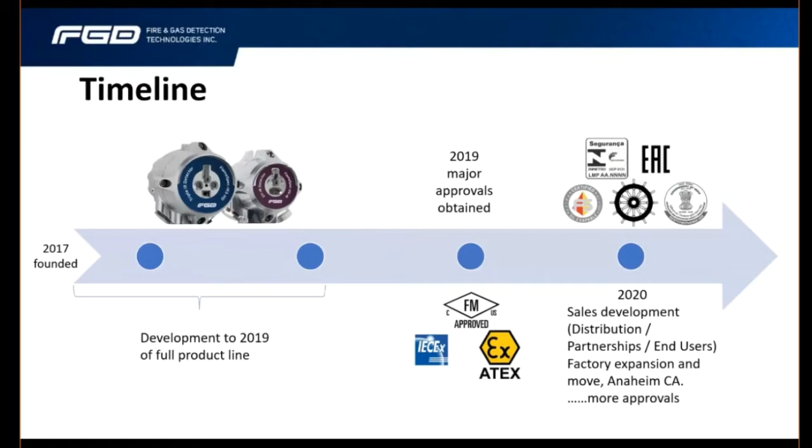We've also started development of an open path gas detector platform, and we'll present more on this at a later date. And so today we have two flame detector product lines matching technology with fire risk and application considerations. The technologies cover UVIR for hydrocarbon, metal, and inorganic fires, IIIR for hydrogen, silane, and some other special applications, and of course IIIR for visible and invisible hydrocarbon fires.

The two product lines were developed to have the same flame detection and fire alarm integration capabilities. The main difference between the two lines is with the video capability of our HD detectors. We will learn more about this in this presentation. Right now, we will pause to quickly review what affects flame detector response.

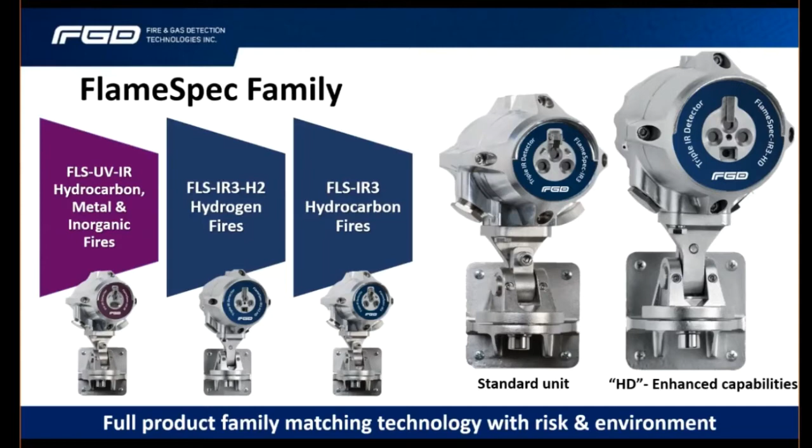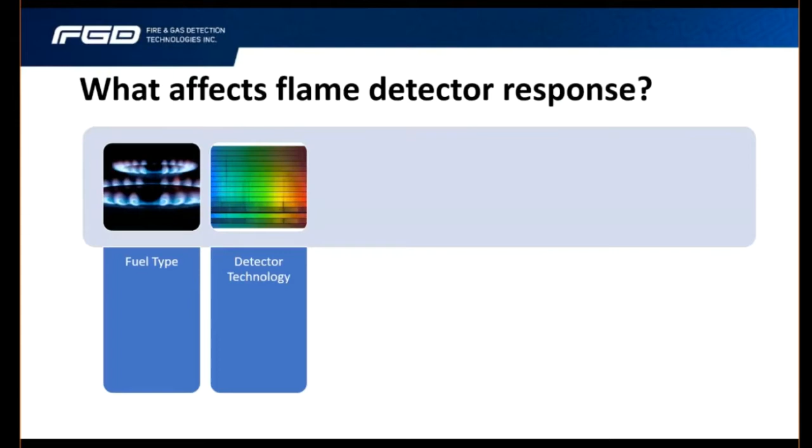Our starting point is always what is going to burn. A large luminous smoky flame like crude oil, or a low energy near invisible flame like methanol burn very differently. Whichever it is, we must ensure the flame detection technology selected is able to respond to the fuel burning. Detector sensitivity and distance from the fire are very much linked factors.

We then need to consider the detector field of view in both the horizontal and vertical planes. As a side comment, you might find it interesting to learn that a field of view greater than 90 degrees in the horizontal axis does not always equate to better performance. I'll leave you with that thought for now, as we will discuss this point further in the presentation.

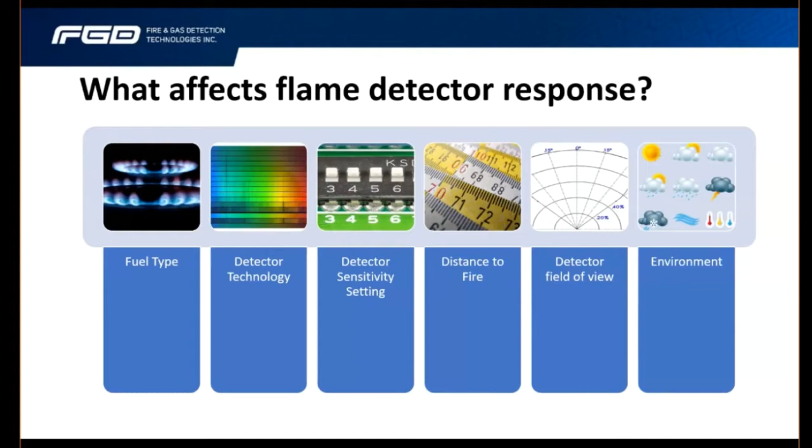And another point to consider is the environment in which the detector is installed. For example, the demands of a detector in an acoustic enclosure of a gas turbine are very different to the challenges posed by the depths of winter in Canada or Kazakhstan. And last but not least, we must turn and consider false alarm sources.

Flare stacks are friendly fires. The challenge is that no flame detector can tell the difference between a hazardous fire or a friendly one. Care and attention with the installation, linked with mechanical blinkers and sensitivity reduction, can normally help minimize false alarms.

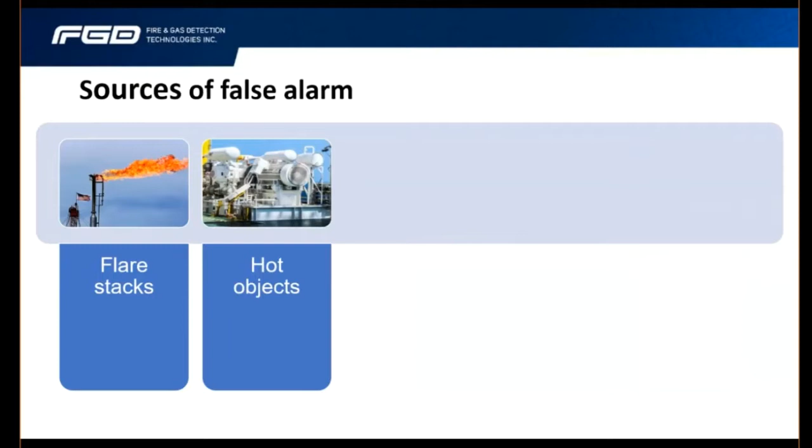Hot objects, as we will see in this presentation, can cause issues for some flame detectors. The main recourse here is to reduce sensitivity. Sunlight and sunlight reflections can be an issue for some flame detectors. Mechanical blinkers may help where this is an issue.

When hot work is being conducted in close proximity to a detector, it is normal to isolate the alarm outputs. The main historical issue relates to arc welding and UV detectors, although activities where heat is produced, such as grinding and cutting, may be an issue for some IR flame detectors.

And finally, hot CO2 or carbon dioxide emissions can cause some multispectrum IR detectors to alarm if they are mounted in close proximity to the source. This issue can be resolved by relocating the detector, or if this is not an option, other solutions may be available. The challenges posed by the fire risk, application and installation and presence of false alarm is a complex one.

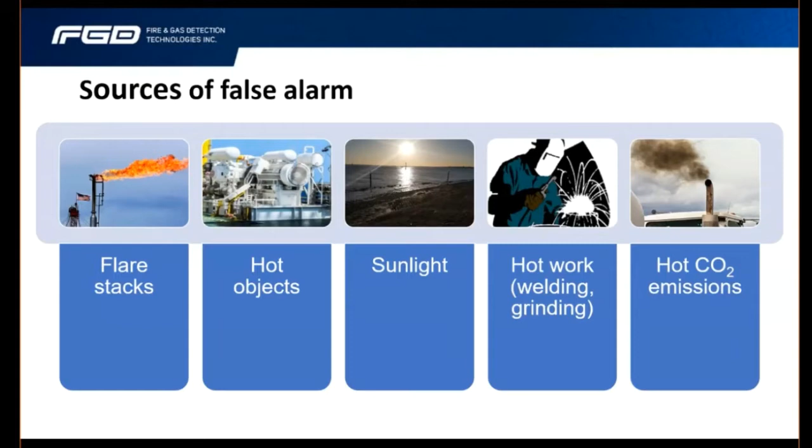So when we take these points into consideration, we must always ask, is there a perfect flame detector? And as always, the answer is no. All flame detectors have strengths and limitations. Therefore, when selecting a device, it is important to use the most appropriate technology for the application. This is, of course, why we have a range of products and technologies that match the challenges of the installation with the detection performance needed. In this webinar, we will be focusing on the FlameSpec IIIR hydrocarbon flame detector.

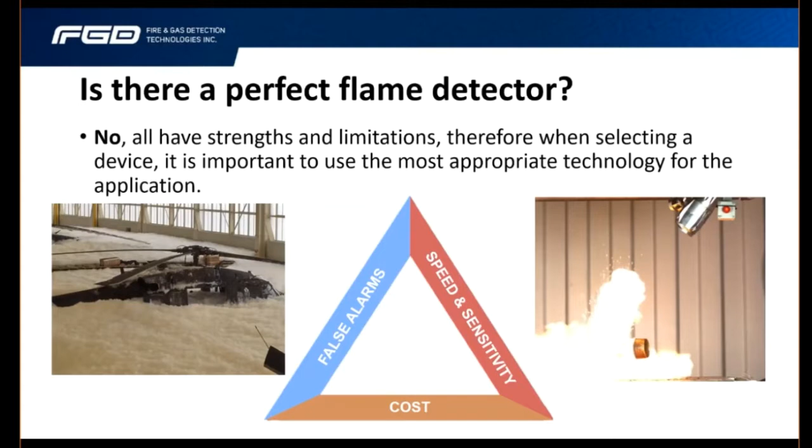So, what have we developed? Well, we developed a detector that in a single unit responds to explosions, fast fires, slow evolving fires, small fires, and big fires. The detectors work indoors or outside over an extremely wide operating temperature range. The detectors have best-in-class response to a broad range of fires and outstanding false alarm immunity, all of which is

approved by Factory Mutual. In a single unit, we deliver as standard fire and fault volt-free contacts, a 3-wire 4 to 20 milliamp, both current sink and current source, an isolated 4-wire 4 to 20 milliamp, and an RS485 port utilizing Modbus RTU. We also include heated optics, adjustable sensitivity and time delays, all again as standard. What is more, all of our detectors are delivered with a 5 years warranty.

As mentioned earlier, our HD units provide a live video feed and high-speed recording of events, 1 minute before the alarm and up to 3 minutes after it. I'm sure you now want to know something of the detail of what we've actually done. So, with a mature technology, it's unlikely that dramatic improvements in detector performance would occur due to changes in any one area. In the following slides, you will see that subtle incremental changes based on years of product knowledge have culminated with the development of the FlameSpec IIIR.

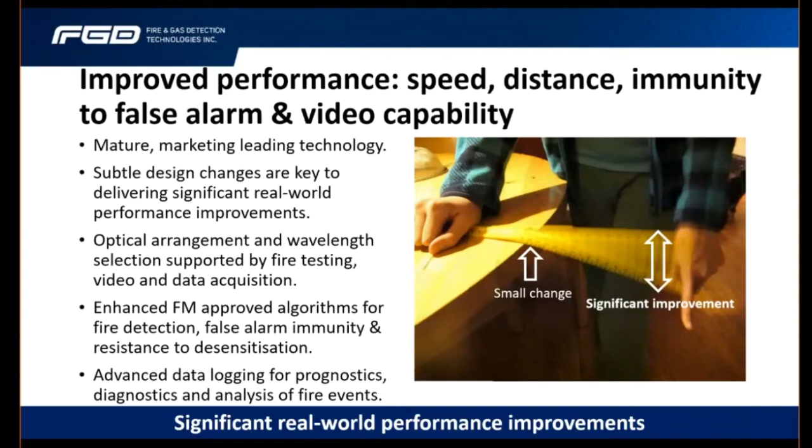Excellent. Thank you very much for that. And just so you know, I now have to open the next poll, which will be coming up later in the presentation. So, okay.

So moving on, what we now need to focus on is the wavelength and filter selection. It is widely known that hydrocarbon fires generate a plume of hot carbon dioxide, and that most IR3 flame detectors use this key feature to detect flames. Our fire band wavelength is centered around 4.5 microns, and we use two adjacent guard band wavelengths, one at 4 and one at 5 microns. These wavelengths help improve the false alarm immunity of the flame detector.

One point I should highlight is that there is no overlap of the wavelengths we use. This is important as it means the information we're receiving from each sensor is uncluttered. A good analogy is to think of the sensor filter combination as a single pixel camera. The colors that we receive from these cameras are vibrant and sharply defined, and they are completely uncluttered. This means that the analysis of thresholds, signal ratios, and correlations can be conducted more quickly. This, coupled with enhanced signal flicker frequency analysis, improves positive fire detection and false alarm immunity.

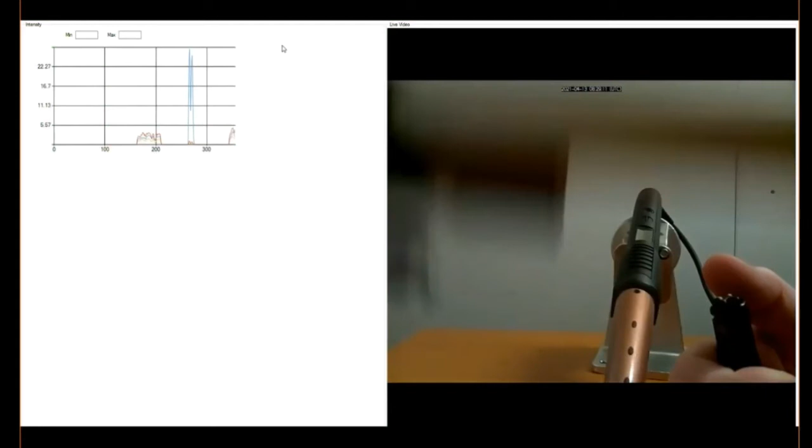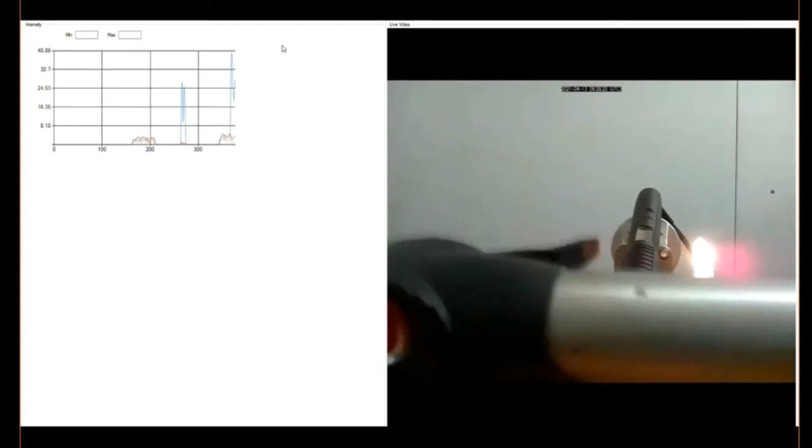The second video on this slide demonstrates a much harder challenge for the detector, as we are actively trying to confuse it by mixing a modulated heat and flame source at the same time. As with the modulated heat source video on the previous slide, the detector could be looking at a hot vessel, heat exchanger, or pump when the chopping motion of hot, cold would be seen. This time, watch as the 3 signals are generated due to the modulation, and then what happens when the flame is introduced. You will see that the correlation of the guard band wavelengths remains closely matched, and that the response at 4.5 microns is very strong. The detector correctly identifies that a flame is present.

One other point just to note was that the traces were all continuous, so I promise you there's no smoke or mirrors or video editing going on there.

Next, we need to look at our enhanced optomechanical design. The FlameSpec fascia gives it a very distinctive look and feel. Unlike some competing products, we have no need to use sunshades to stop water dripping into the detector optics. This is because we have a brow that forms part of the stainless steel casting. The 3 IR sensors sit behind a heated sapphire window. The FlameSpec design uses a heating element in direct contact with the window, as this is a more efficient way of heating the optical surface than using an array of resistors mounted more remotely. As a result, we have lower power consumption than many competing devices.

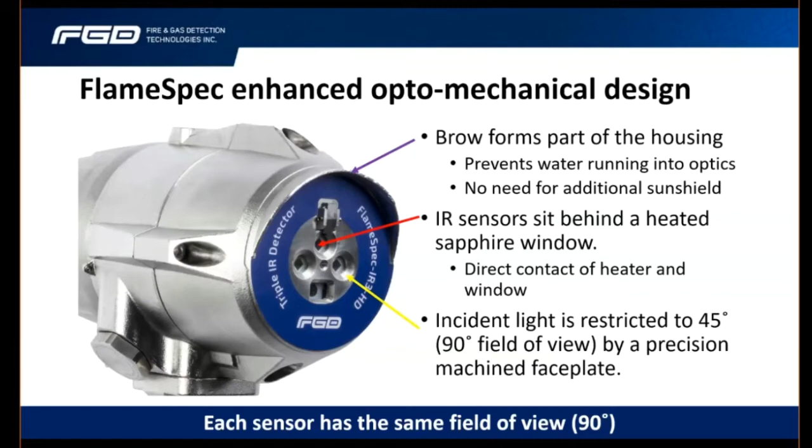Finally, each sensor sits in a precision machined pocket where incident light is restricted to 45 degrees either side of the central axis, thereby giving a 90-degree horizontal field of view. It is important to stress that each sensor, rather than the detector as a whole, has exactly the same field of view. Let us review this in more detail.

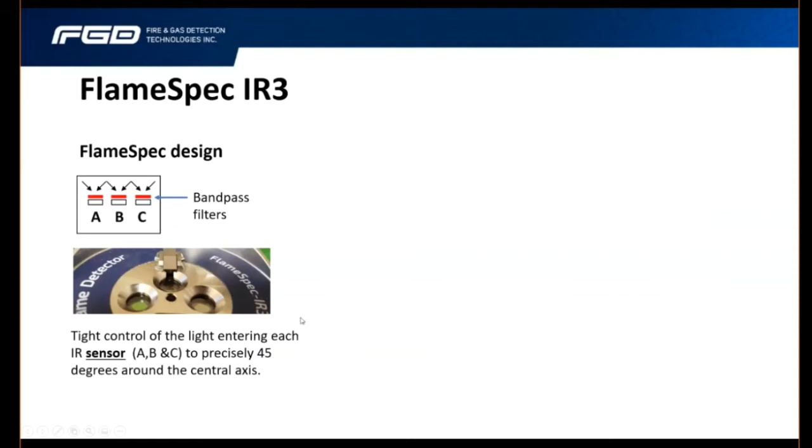Looking at the FlameSpec design, we can see each of the 3 sensors is tucked behind a bandpass filter, selected to the wavelength of interest, either 4, 4.5 or 5 microns respectively. As mentioned previously, this precision machined pocket restricts light to 45 degrees either side of the midpoint, thereby giving each sensor a horizontal field of view of 90 degrees.

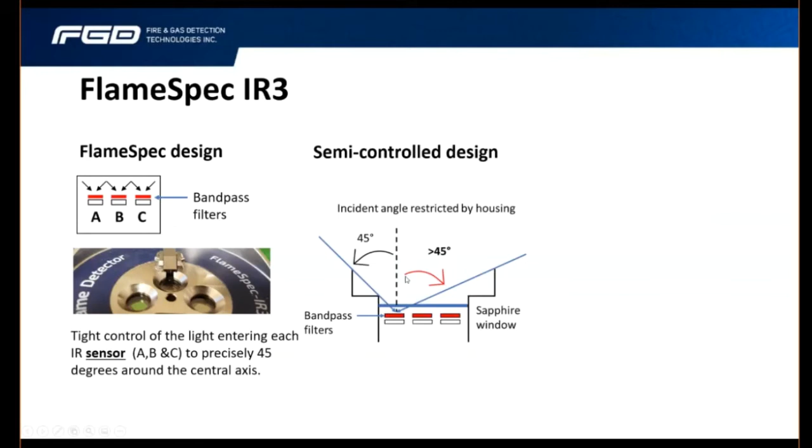If we consider an alternative semi-controlled design, the detector may claim to have a field of view of 90 degrees, and it is clear that light entering the extreme left of the sensor is restricted to 45 degrees, but light to the right-hand side of the center point is unrestricted. I'm sure some of you are asking, why is this important? Well, the challenge faced by this design is called blue shift.

In basic terms, the transmission properties of a bandpass filter change depending on the angle of incoming radiation. When infrared energy enters from angles greater than 45 degrees, the sensors see different wavelengths. This unwanted additional data can distort the ratio and correlation of the signals received, which may impact the ability of the algorithms to correctly differentiate fire from false alarm, meaning that the device performance may be compromised.

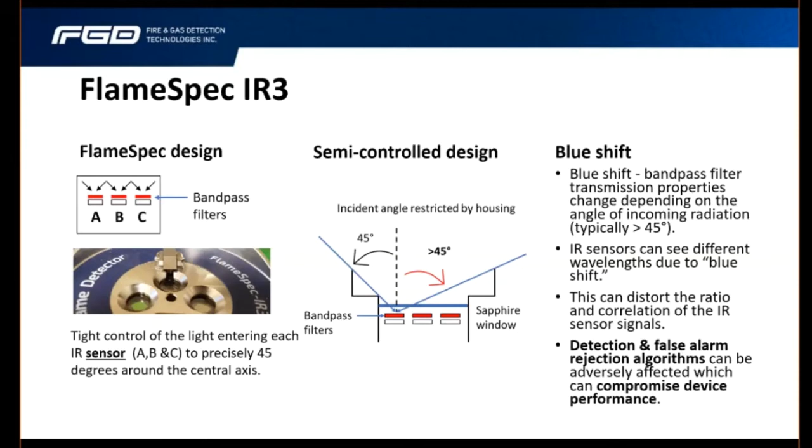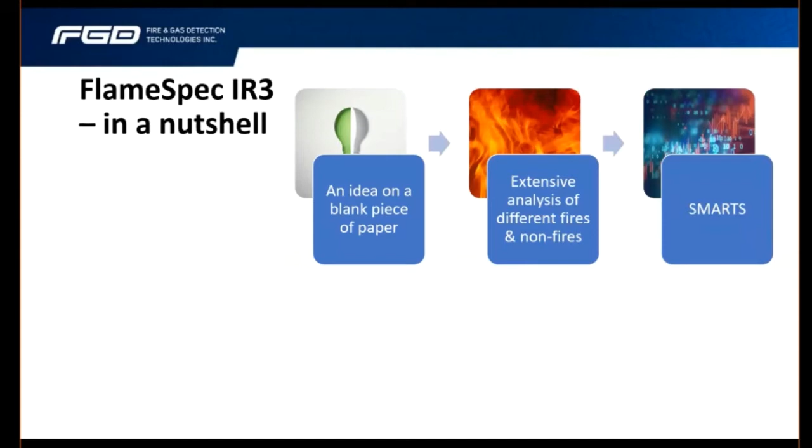Moving on, let's have a quick look at our design. Pictorially, this slide represents the journey we've been through with our FlameSpec IR3 development. We started with a blank piece of paper and a mature technology. We knew that dramatic improvements in detector performance would be unlikely due to changes in any one area. We therefore started to capture data and video of fire and non-fire events and developed algorithms from scratch using this data as input.

We've already seen how our optomechanical design tightly controls light entering the sensors and why this is important. The integral visor simply stops water from dripping into the optics, which are heated to prevent ice or condensation. The PCBs are tropicalized and the termination compartment is integral to the detector but segregated, which usually makes for a less problematic installation.

We also have possibly the most complete range of outputs that can be purchased in a single part number. A 3-wire 4-to-20 current sink and current source, as well as the isolated 4-to-20 milliamp. We have fire and volt-free contacts and an RS485 port using Modbus RTU. But we're not finished there. We also offer detection of explosions.

Our ultra-fast detection mode is available in all FlameSpec detectors and uses an independent and parallel detection path to our standard flame detection algorithms. Ultra-fast detection does not affect the speed, sensitivity, or any other aspect of the standard detection mode. Similarly, the sensitivity and alarm delay settings do not have any impact on ultra-fast detection. The ultra-fast response for our IR3 detectors is 40 milliseconds to fireballs and explosions at short distances.

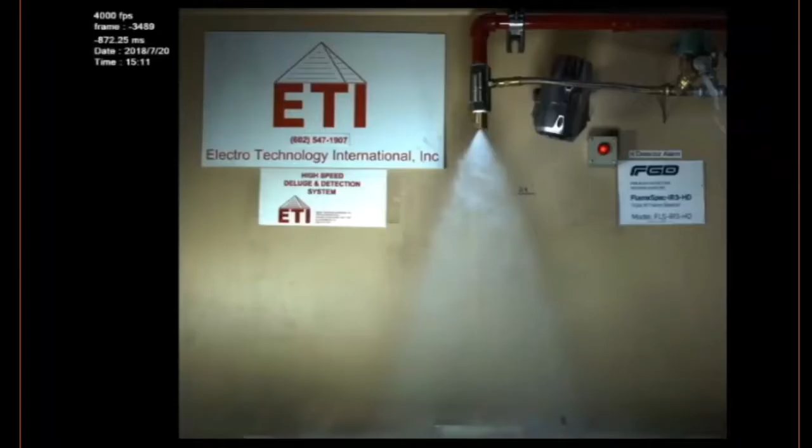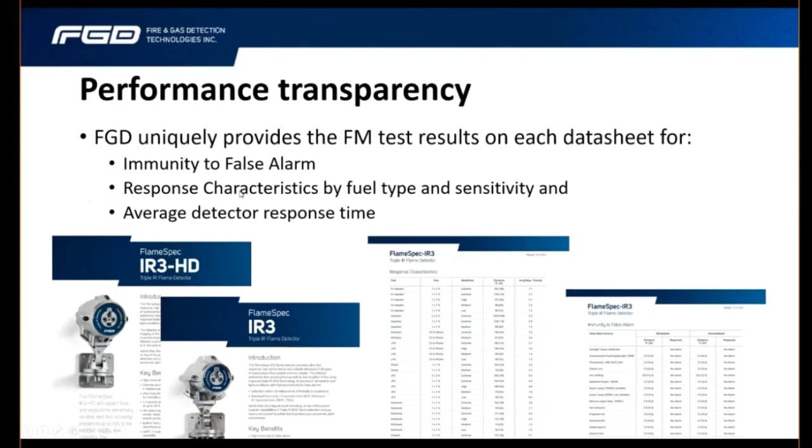Okay, now let's explain a bit more about the published data that we have. In the next few slides, we will show in more detail the performance levels we've achieved with our FlameSpec IR3 detectors. To my knowledge, FGD uniquely publishes more FM data in our product data sheets than any other manufacturer. The details published include detection distance and response times to different fuels. We also include the results of immunity to false alarm in both modulated and unmodulated conditions. Let's look at some performance data.

Let me explain a little about this slide. The response times shown are the average response per our FM test report. The fire under test is the same. It is the standard 1 square foot or 0.1 square meter n-heptane fire at each distance. This means as we move further from the detector, the radiant energy it receives reduces. This essentially matches the inverse square law. So if we double the distance from the detector, it can only see a quarter of the energy that it saw at the shorter distance.

In order to maintain detection, we manually increase device sensitivity. One interesting point to highlight is at the limits of detection. Looking at the extreme sensitivity to the right-hand side of the slide, you can see this is around 80 meters for this fire type and size.

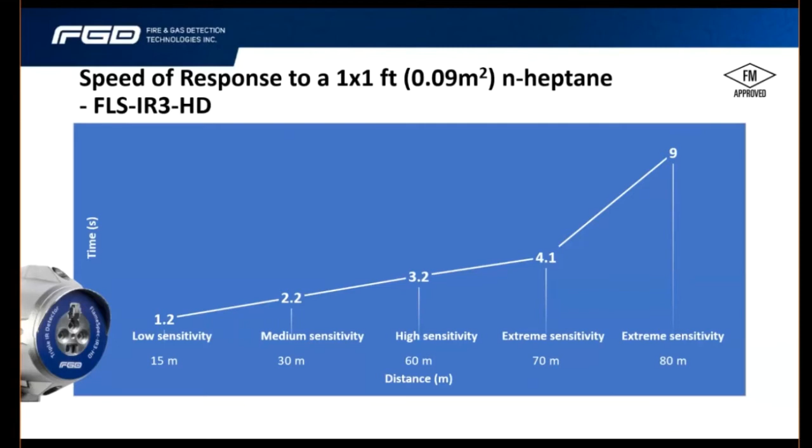You'll also see that the detector takes longer to decide if a fire is present at 80 compared to 70 meters. This is because the detector runs additional validation checks when the received fire signal is low. Let's now look at some other of our FM data.

Here we present performance data extracts of our IR3 and IR3 HD product data sheets. The information shown relates to different fires, including liquids, gases, and solids. The detection distance and average response time is given for the stated fire size and sensitivity. I'll give you a few moments just to scan the data. Whilst you're doing so, I'd like to point out a couple of things.

First of all, the response time for the two detector types are broadly similar, but not identical. This is simply due to the experimental setup, as the fires were not conducted simultaneously. As a side comment, we do have some simultaneous fire test examples later in this presentation, where you'll see much more correlation in the speed of response because the detectors will see the same fire.

Secondly, it's worth pointing out that the detection distance is not fixed. For example, our IR3 can see beyond 80 meters if you look at the response data for the 2x2 gasoline fire, but the fire must be bigger to do so.

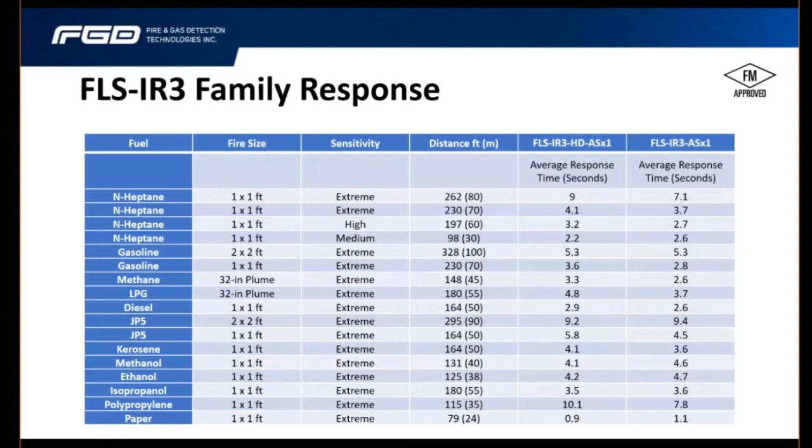Moving on. The information presented on this slide relates to the factory setting of both units. Most manufacturers' default is medium sensitivity, which typically means 30 meters or about 100 feet to the standard N-heptane test fire. Whilst the list of fuels shown is not exhaustive, the data presented is FM approved. Generally speaking, I think the data shows the FlameSpec to have a more uniform response across different hydrocarbons, whilst at the same time giving improved sensitivity and speed of response.

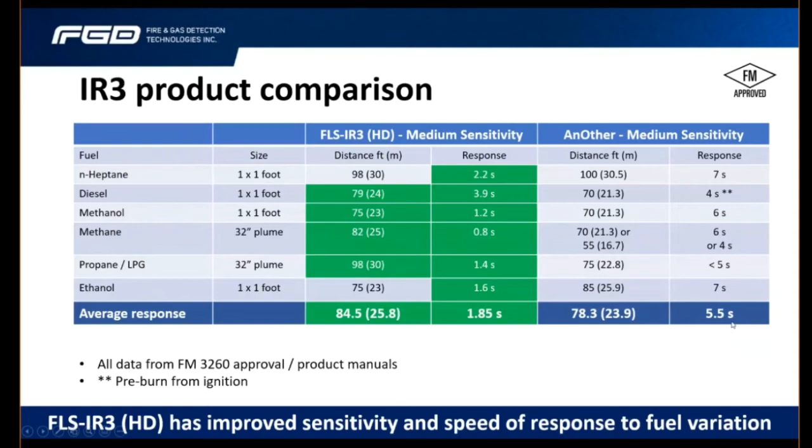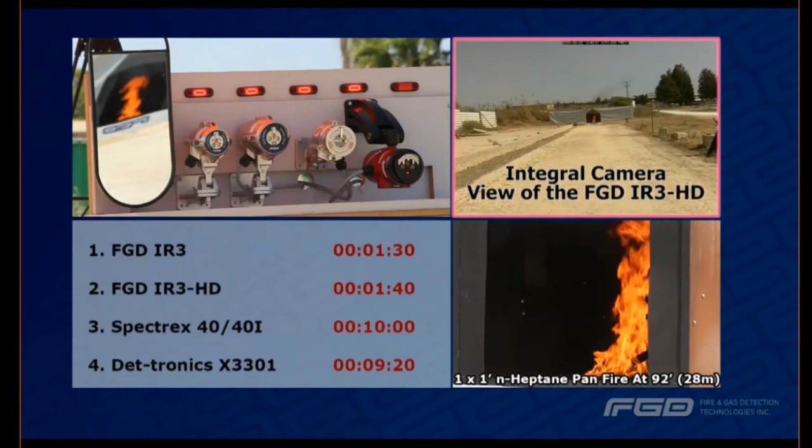A couple of slides back, I mentioned that we would see some simultaneous fires, and this is an example. Here you see there's a much closer correlation between the speed of response of our detectors.

And now I have another quick poll for you. So there's 3 questions to answer just based on some of the information that we've seen. You have approximately a minute to respond. We're just waiting for a couple of respondents to complete the poll.

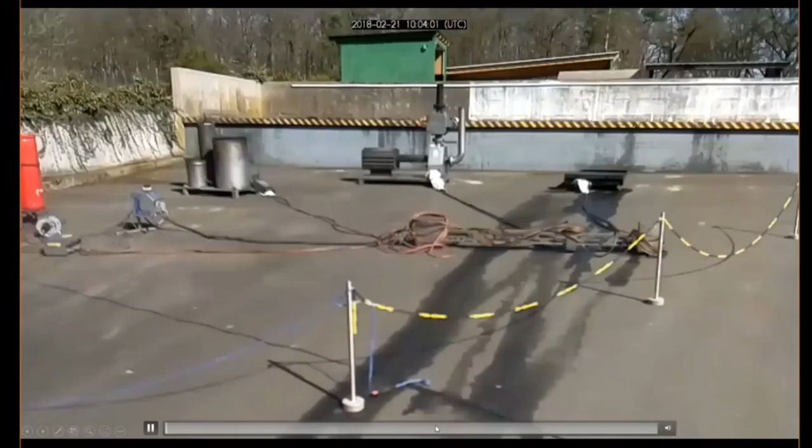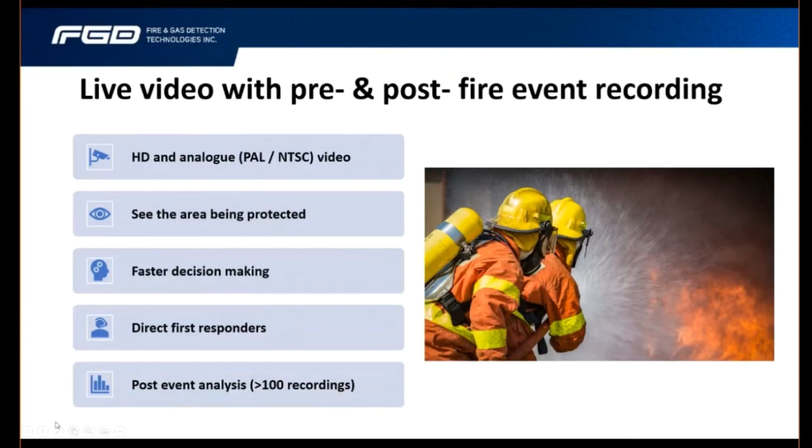There's the time and date stamped information, and you'll see the detector responded. The event video feed can be extracted using a web browser, the ONVIF device manager, or our own FGD communicator. By way of a quick introduction, here is our FGD communicator.

This software is required if changes are needed to the configuration of the detector when shipped from the factory. The main features of the software are the ability to communicate using Modbus over an RS-485 port. Parameters such as sensitivity, the ultra-fast response, the delay time, latching of relays or the standard 4 to 20 milliamp signal, the selection of the heater, and also whether you want video on or off, or whether you want to select PAL or NTSC video, are all available through a password protected environment.

The software can also communicate with the IR3 HD via an internet connection that allows live streaming of the video and the ability to retrieve event recordings. In the next few slides, we will cover detector testing, approvals, and accessories.

Testing can be conducted externally using one of our ATEX approved flame simulator kits or via a manual built-in test. If testing is conducted using the test torch, the detector outputs are activated and a complete system check is performed. The manual built-in test has two options. One that simply tests the detector internals and the cleanliness of the optics, and the other that performs a full loop test in much the same way as the test torch.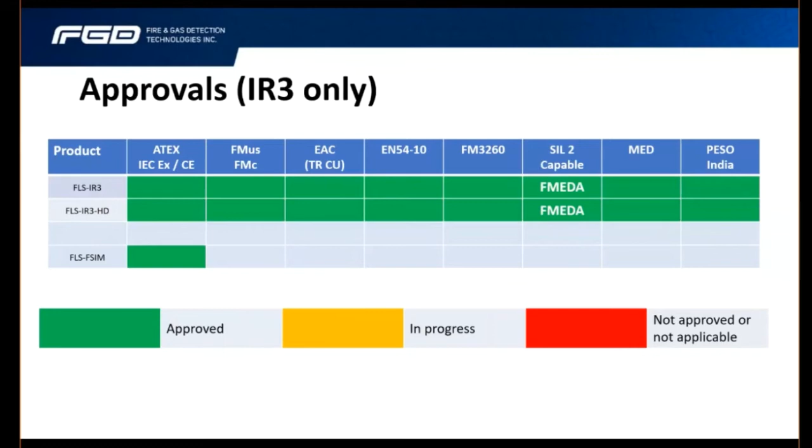Moving on, just a few slides to talk about our accessories. The tilt mount bracket offers true versatility for installation, and it has adjustment in both horizontal and vertical axis. What is more, the fixing centers of the base plate are identical to some of the market leading brands, meaning retrofits are very straightforward. The pole kits can be mounted with a 2 or 3 inch pole as standard, and others are available on request.

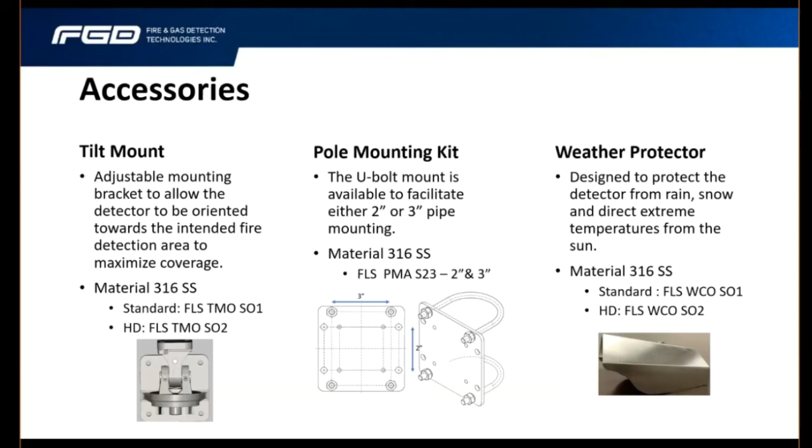If customers insist, we can also supply sunshades as well. And the latest addition to our range is an air shield. This item can be supplied either for the standard or HD detectors, and the air shield uses compressed air to flow an air curtain across the detector window, thereby preventing accumulation of dirt on the detector or the camera window.

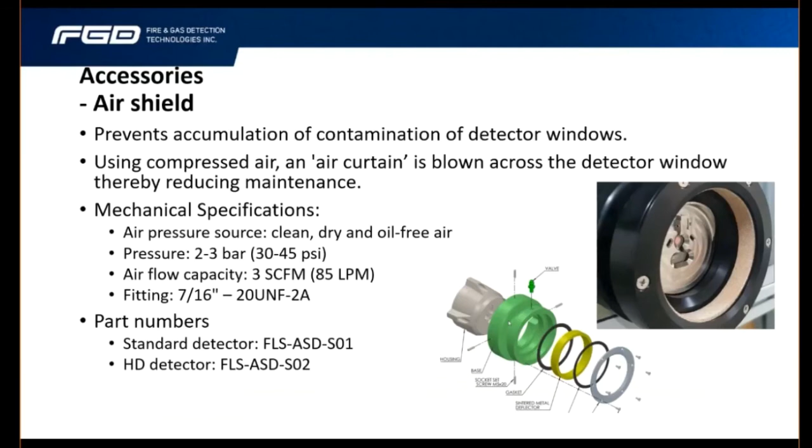Now looking at some applications, we're able to satisfy a wide range from the most obvious like offshore marine, LNG, tank farms and refineries, things also like large vehicle protection, loading racks and compressors, to the less obvious, aircraft hangars, waste transfer stations, biomass facilities, recycling centers, waste to energy plants, battery storage, spray paint booths and others.

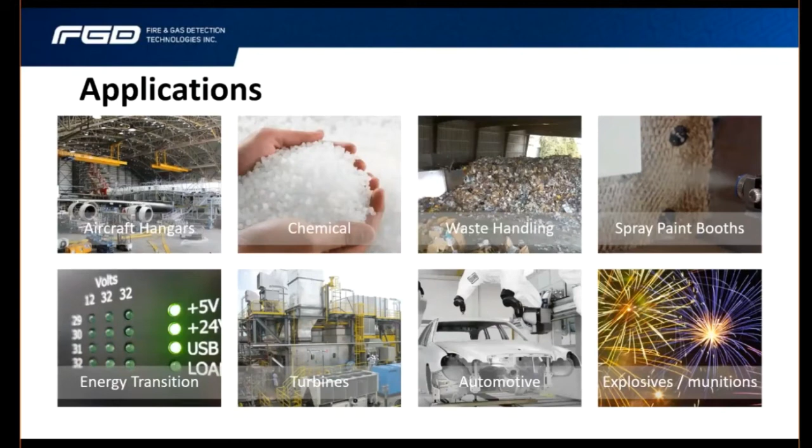And our HD units are ideal when remote monitoring of site or process is needed. Applications like normally unattended facilities, gas plant, remote tank farms or pipeline booster stations spring to mind for the use of the video. We're now coming towards the end of our presentation.

I'd therefore like to summarize our development in this our webinar entitled Delivering New Performance Levels in Optical Hydrocarbon Flame Detection. By way of a summary, I'd like to mention what we discussed. We had a short overview of fire and gas detection technologies and how we developed since being founded. We then summarized flame detection technologies and what affects detection and false alarm immunity. The main focus of this presentation has, of course, been our FlameSpec IR3 hydrocarbon flame detectors. We discussed how we started from a blank piece of paper and a mature technology.

We knew that dramatic improvements in detector performance would be unlikely due to changes in any one area. We therefore started capturing data and video of fire and non-fire events and developed algorithms from scratch using this data as input. We saw how our optomechanical design tightly controls light entering the sensors and why this is important. The integral visor simply stops water dripping into the optics, which are heated to prevent icing or condensation.

The PCBs are tropicalized and the termination compartment is integral to the detector but segregated, which, as mentioned before, usually makes for a less problematic installation. We also saw that our FlameSpec IR3 detector has a more uniform response to different hydrocarbons, whilst at the same time giving improved sensitivity and speed of response, all of which is independently approved by Factory Mutual.

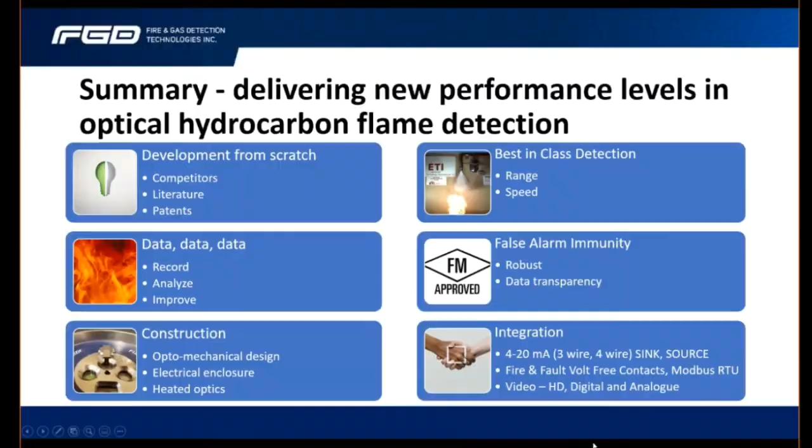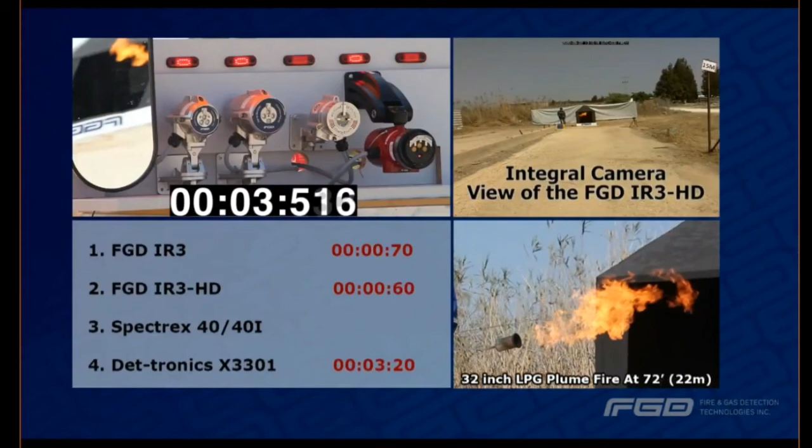Finally, I have one more head-to-head comparison of market-leading devices, this time to a gaseous fire. The intention again of this video is not to knock the detectors of the competitors. They are high quality and they respond in a timely manner. We're simply wanting to demonstrate the additional speed gains that we have achieved. Naturally enough, all the detectors are configured in the same way. And as before, I'd just like to mention how closely our detectors actually match one another.